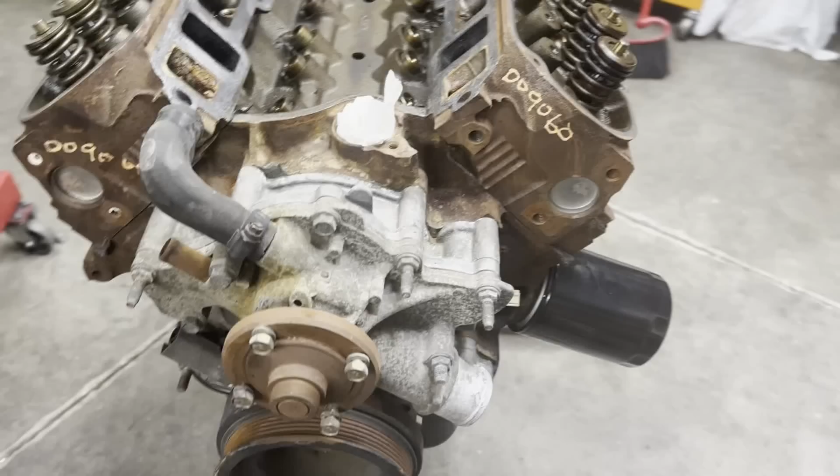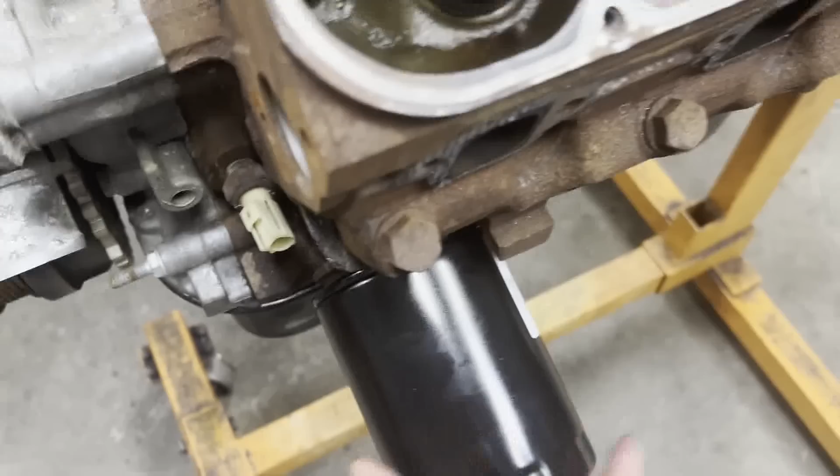This is our GT40 headed 302. This is Project Triple J or JJ Jr. Nothing has really changed that much since the last time that you saw it. I did get our oil filter nipple on here.

So I took the right-angle adapter off of the engine that's made for the truck platform, and put that nipple in there so we get our Wix filter in. Oil pan is on. We put a cup plug in where the dipstick goes.

For this video, we're going to just be doing more configuration work to get the engine ready for dyno. I am going to dyno it as it sits with the factory cam and everything in it. We have 3 intake manifolds coming. So I've had some heart-to-hearts with good friend and head porter Joe Crane, and we've got our plan of action laid out as far as the steps that we're going to take.

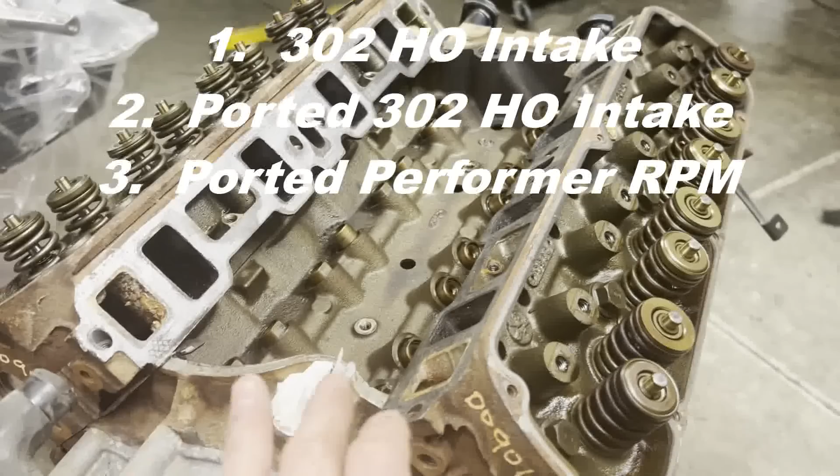We're going to dyno first with factory cam, factory cylinder heads unported. We're going to try 3 different intake manifolds, an original high output 5.0 302 4-barrel intake from the early 80s, another one of those intakes that has been ported, and then a ported Performer RPM intake. So I've got a couple sets of intake gaskets on the way. Hopefully I'll just need one. I'm going to grease them up real good so I can pop the intake off and on. But we'll test all 3 of those.

The next iteration will be the E303 camshaft to see how much power it adds with the intake manifold that performs the best from the first test. Then we're going to do some cam iterations, cam grinds from my own design, and then I'm going to have the heads ported, and then bring the heads back, pop it on this factory short block with the cam from my personal selection and the intake that did the best, and see how much the ported heads add.

Then we may do a few more steps in there, but eventually this will be an all-out, I hesitate to say max effort, because max effort has really no ceiling on what's doable. I'm not going to go as far as moving ports around and offsetting the heads on the block and all that stuff. So a goal, 475 horsepower, 500 if I can pull out some really good tricks. So we'll see what we can do with a GT40 302 5-liter bottom end. So we will nowhere be near the 540 horsepower that our 311 made with the AFR heads and all that stuff, but we're gonna see what we can do.

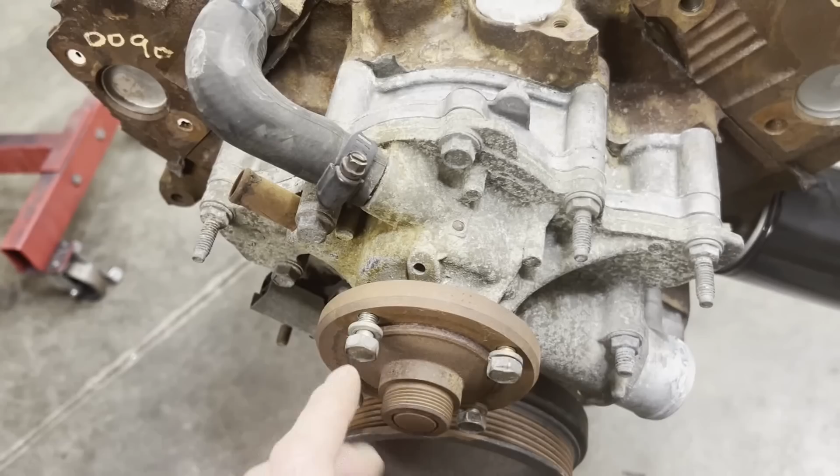As far as water pump, this guy has to come off because I can't run the front accessories that are usually on the front of the engine, the serpentine belt system. I don't have any of that, so we're going to have to drive the water pump electrically. Here's the difference between the two. So with this guy, I can bolt on our little electric water pump cog and drive the water pump. So we'll get that swapped out here in a bit.

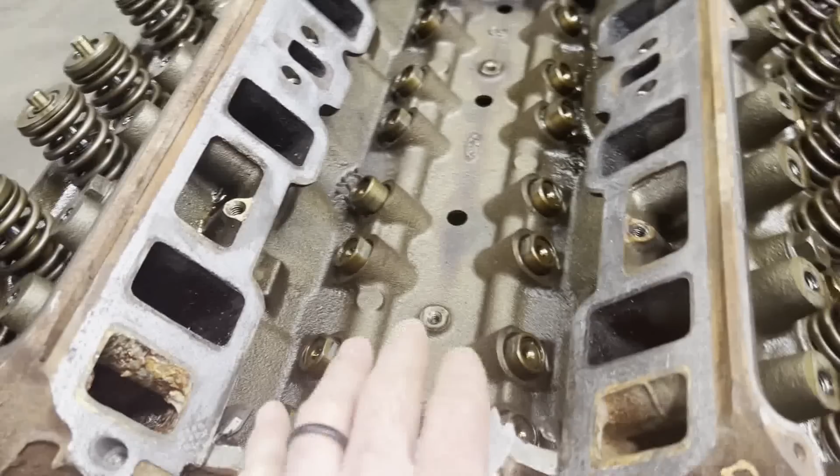I'm gonna fill the engine full of oil. So it's a 5-quart capacity system, and we're gonna prime the pump, make sure that we have good pressure on the gauge, and then I'm gonna pull some valve springs off, and we're gonna get a good accurate install height measurement. We're gonna see the diameter of this step that's around the guide, and then get a game plan going for some valve springs, because I do want to change valve springs before we start all this camshaft stuff. I don't want to have to do that again later on down the road. So we'll get everything up to snuff there. So let's get right to it.

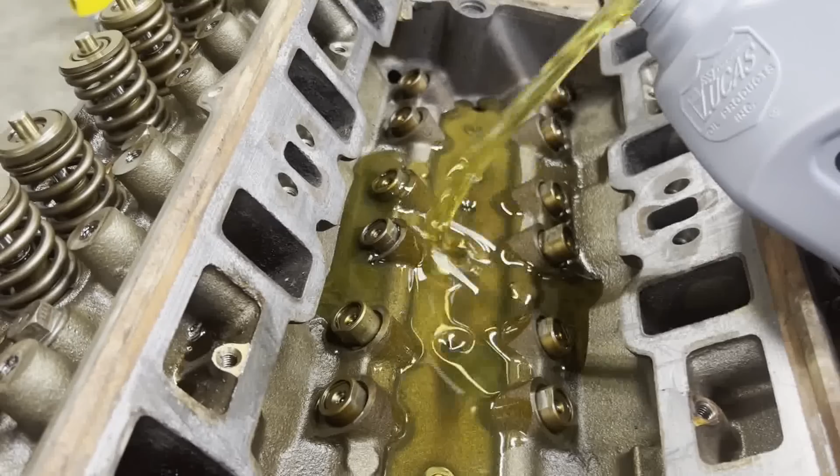We're going to put 5 quarts of oil in this thing, and then get a priming tool and see what we got. This is one of those times where I'm wondering if I left the plug in the pan. I'm pretty sure I did. We'll find out shortly. I'm using some Lucas break-in oil, some 520. My feet aren't wet, so I think we're going to be in good shape. Alright.

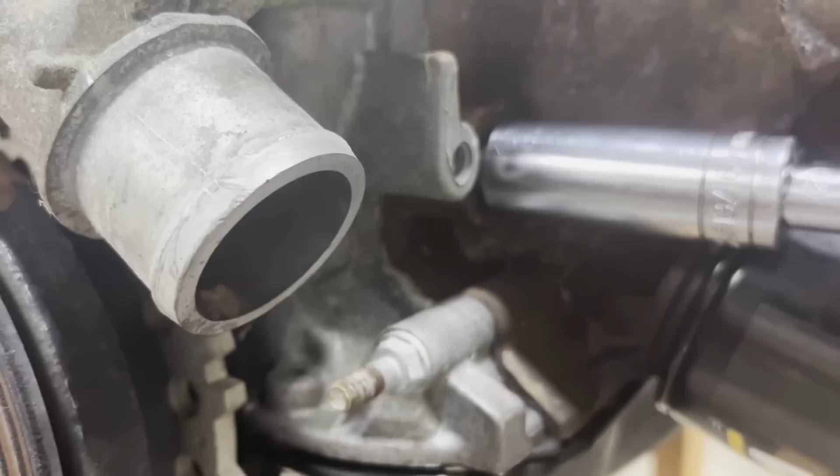Next, we're going to back this oil pressure sensor out of the block. Then screw in our gauge fitting for our analog oil pressure gauge. All right, I'm gonna get you up here where you can see.

Well, it looks like 60 pounds is all she wrote. I think that's about normal for just a standard volume, standard pressure pump. We're not going to be turning any RPMs. Even if we turn 6,000, we should be in good shape. If in the event that it dips down, we can always add a little heavier weight oil. But I think we're in good shape as far as that goes, and everything looks healthy.

I was getting a lot of oil out of the lifters. None of them are collapsing, so that's good. I'm pushing down pretty good on these guys. So if I were to push down and feel the lifter plunger go out from underneath me, then that would mean that I would need to replace those lifters. I think these are going to be in good shape for what we're doing.

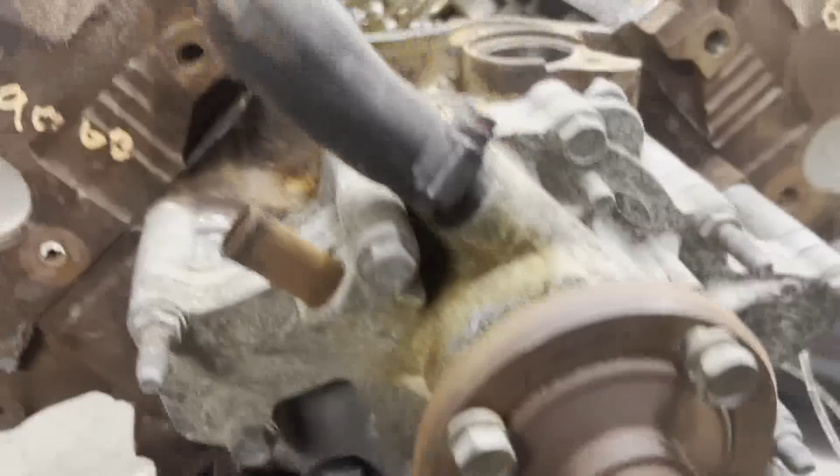All right, next step is to get this old ratty water pump off. So Fords have about 37 different bolts holding it to the timing cover. Never really understood that, but so 1, 2, 3, 4, 5, 6, 7, 8, 9, 10. I can't remember if I counted that one or not. So 9 or 10 bolts holding it on, which is pretty much ridiculous.

And then you have the small block Chevrolet on the other hand that holds an entire valve cover on with just 4 bolts. So I don't know what these guys were thinking, but they were thinking something, just not the right thing. All right, so let's get this pump off.

Alright, I got some scraping to do, but I'm going to have to leave you guys for a little while. Got my FAA medical scheduled for 11 o'clock this morning, so need to go get that taken care of, and then I'll be back. Wish me luck, and I'll see you soon.

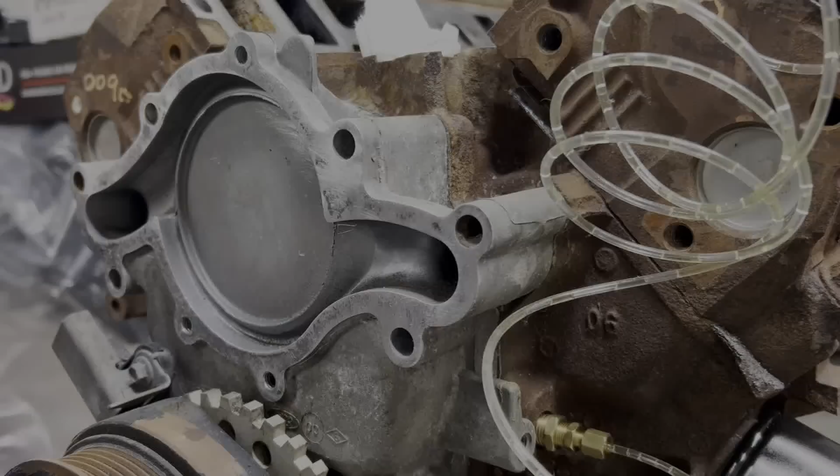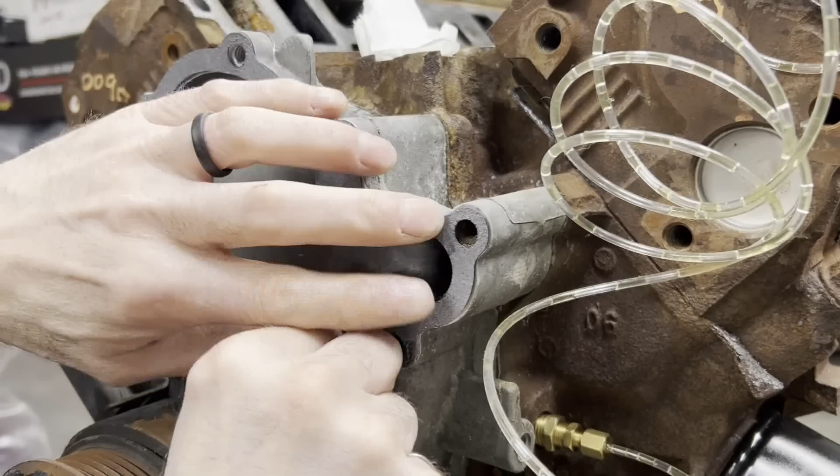Alright, I got the gasket surface cleaned off about as good as I can get. I used a little soft Roloc disc to scrape it clean. Put a little dab of silicone on here to help us with any imperfections. Oh, I'm back, by the way. It helps the gasket stick as well. Go back with a little layer.

Alright, so we got that bolted back on. How does that look? Filthy, rusty, nasty engine, beautiful new water pump. Alright, so before we tackle the valve springs, I got our MSD distributor, and what I'll do with that is pull the weights and the bushing out and lock that thing down. I don't really care anything about initial and advance. I just want it to stay the same all the time. So we'll do that real quick and then get on to looking at our valve springs.

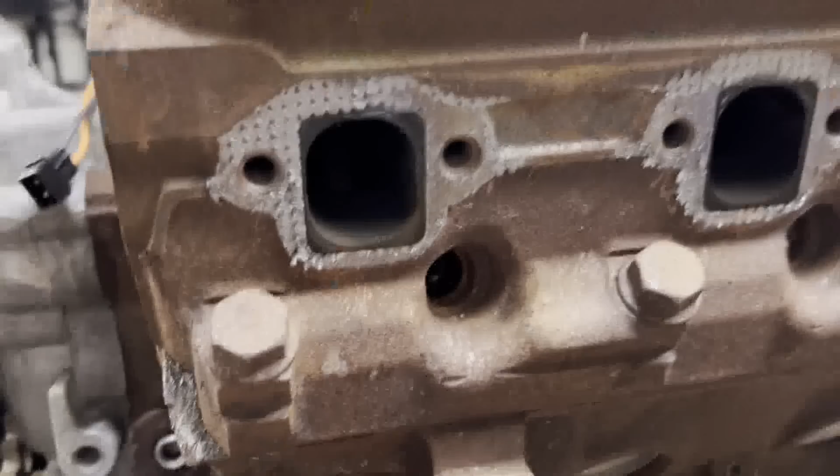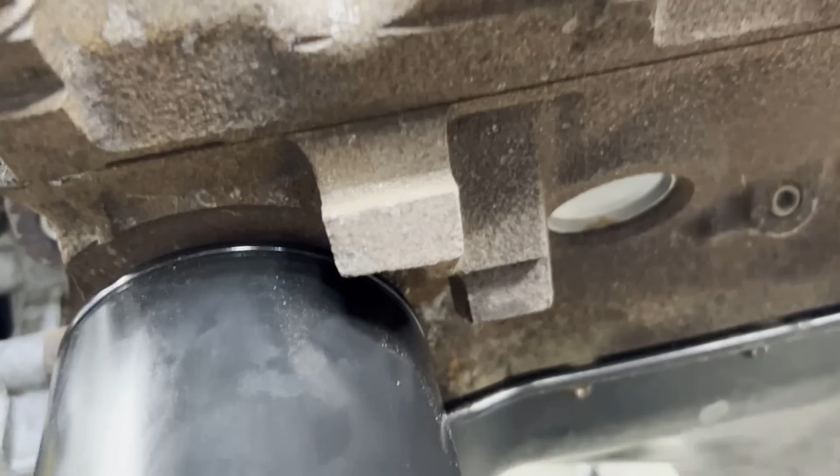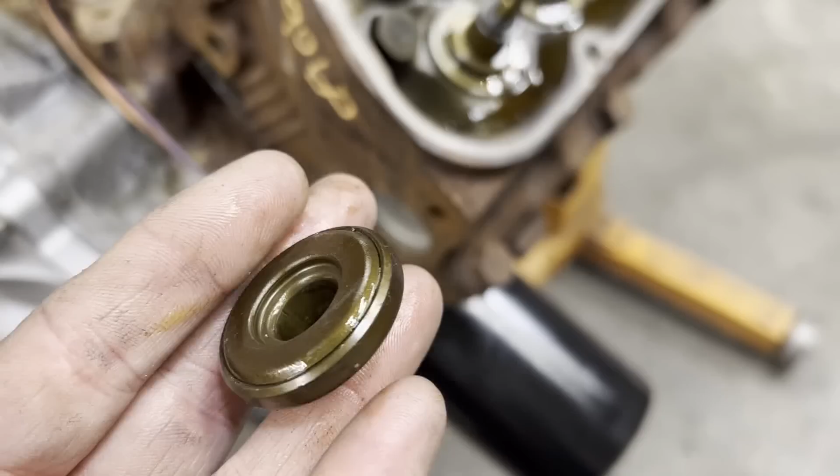All right, so we're on to the next step, and I've got this number 5 piston at top dead center, and it's interesting to see when I was looking through the spark plug holes that you can still see the crosshatch on the cylinders. I know I've been saying it a lot during this build, but we are in pretty good shape so far. Got a couple of springs off. These are just little single springs, no damper, no nothing. And these big fat retainers that weigh about 17 pounds a piece.

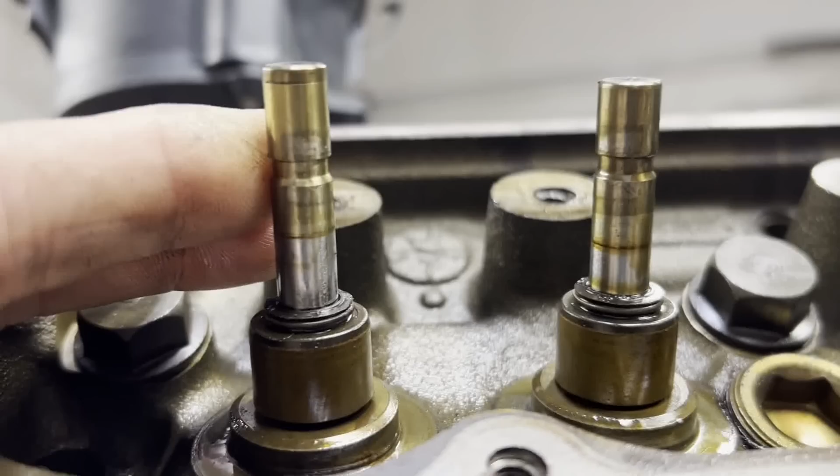So what we're going to do now, you can see the difference between where the locks go. So very far down from the tip on the exhaust side, not so far down on the intake side, but it's going to prove to be a little difficult to get some good springs, but I'm pretty confident that we'll find some. I'm going to measure this step and get a measurement on that. Then I'll use just a plain 10-degree retainer and a pair of standard locks to see where we are.

Alright, so I'm just going to take some calipers, get a measurement here best I can. We're just a few thousandths away from an inch. So whatever our spring ID is, it's going to have to be greater than an inch, and I'll record that dimension, and then we'll hop on to our installed height.

So just a couple of quick notes before we get into our installed height measurements. This step right here, I know I just mentioned that. When you guys call in and email in and say, I want a cam, I want a hydraulic roller, to a lot of you guys with factory heads, I'm usually saying you need to watch out for this step. You need to have it cut down. And this is the reason.

So if we look at a modern spring locator, you're not always going to find a spring to fit around this, and more likely than not, you're not going to find a spring on an FE or something like that that will handle the spring loads and everything that you need, that will just by chance fit around this step. Most springs require a locator, which gives the inside diameter of the spring something to locate on.

All right, so I've got some mock-up retainers. You can see that this is a standard height retainer. This is going to be a plus 100 height retainer. You can see where the locks are a lot lower than where the spring would hit on that one. On the intake side, we are hitting 1.810. That should be easy to find for. This guy right here is going to be our issue. So let's see what we got going on here.

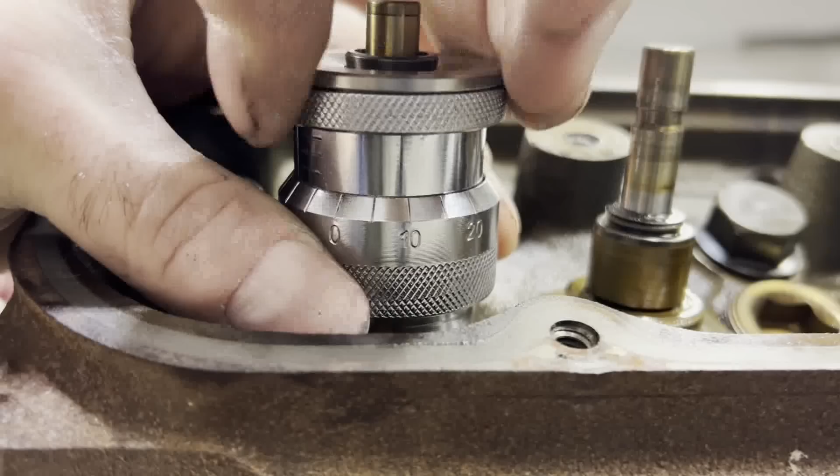Then on the exhaust side, we've got, there's 1.700. So 1.735 with that particular retainer and lock setup. So a standard retainer, standard lock. I can go change this to a plus 100 retainer. Maybe.

So there's 400, 500, 600, 700, 8, 20, 35. So should be easy. I could even use a standard retainer and a plus 50 lock. Let's try that real quick. So our intake was at 1.810. Come on, sweetheart.

Okay, so we're looking at our spring catalogs, and I usually use some Comp Cams springs or PAC springs or Manley springs; PSI springs are usually my go-tos. My first thought was to hit the Comp Cams catalog. So the spring requirements are: one, it has to physically fit the head. The ID has to fit around that step, around the guide. The install heights have to work, and we don't want any coil bind issues or retainer to seal issues.

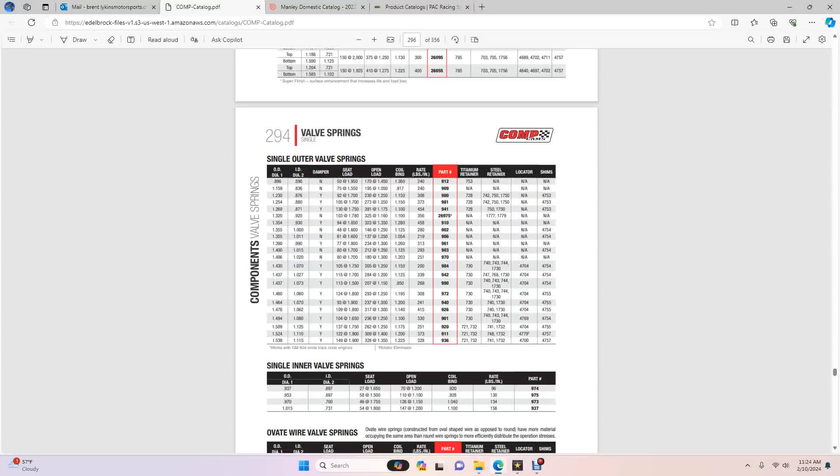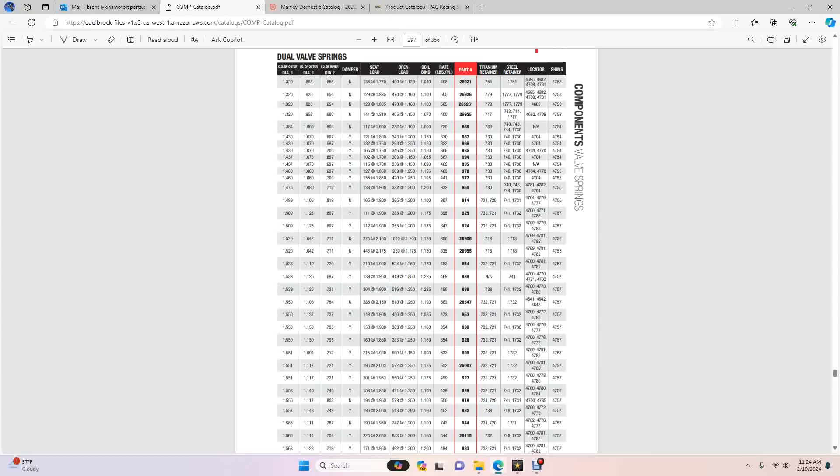The spring loads have to be adequate for not only the factory cam, but the E303 cam and the cam that I have started to work the specifications for to try out later. Due to a dual spring having an inner spring, that pretty much has knocked us out of any dual springs. As you can see here, the ID of the inner spring, we don't see anything here that's a little bit greater than an inch. So that pretty much limits us to either a single spring or a beehive spring.

So looking at this chart, we're looking for springs that will physically fit the head. So an ID of around an inch. So this one, the 902, the 906, 903, 970, 984, 942, 990, 972, so on and so forth. We have to look for springs that have the spring loads that we need. Obviously this 902 spring right here, 48 pounds on the seat, not gonna cut it. So we're looking for something that's at least 125 pounds on the seat.

This 972 spring, at first glance, looks like it may be the winner. So the ID is an inch 060, so it'll physically fit around that step on the head. Seat load is about 125 pounds. It's good for 550 lift. But the clincher is that would work just fine on the intake side of our head, but it's not going to work on the exhaust side.

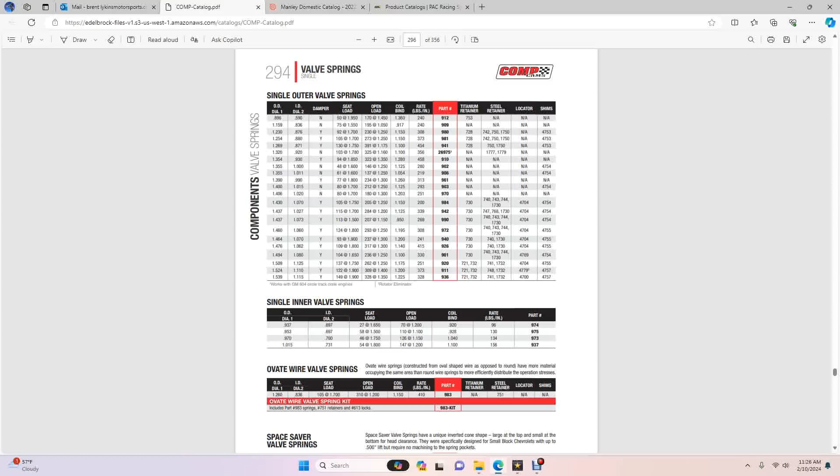So the most install height that we could get with a 50 thousandths lock was a 1775. I really don't want to get into titanium retainers with plus 100 install heights or anything like that. So this would work for the intake side, but it really just doesn't work good for the exhaust side, and is a little light on the spring loads as well.

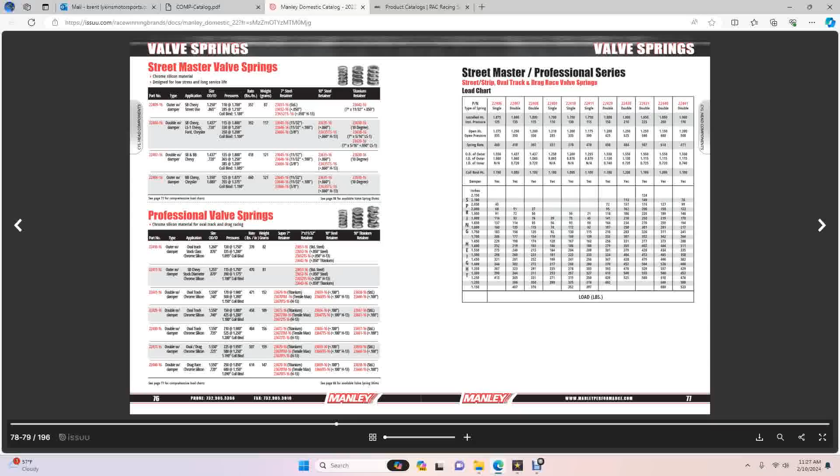So we go to our Manley catalog, and this page is about the only thing that's going to work for us. The subsequent pages are NexTek series with a lot more spring load than what we're looking for. But we're looking for springs again that will physically fit the head. We need an ID of around an inch. This dude right here is the only spring that is close to what we need, but it's just going to be too big on the outside diameter. An inch 550 spring will not fit the cylinder head. So we go to PAC.

I do have one of these retainers in the shop to look at our retainer to seal clearance, and we're in good shape there. So I think that this is going to be a winner, and I'll get a set of these 1211 springs ordered and a set of the R310 retainers ordered, and locks to match.